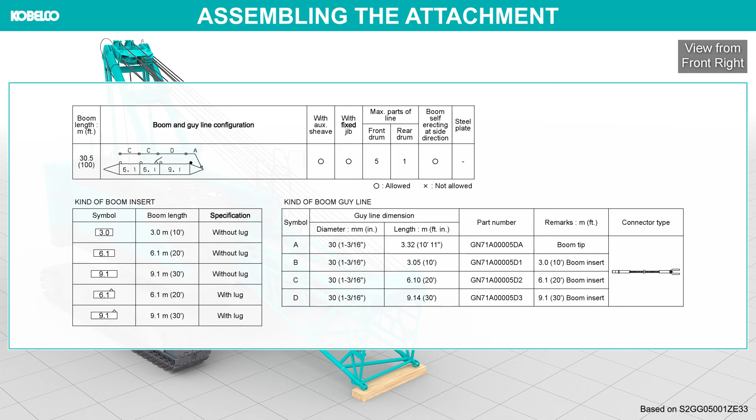This assembly procedure starts when the machine is under the following conditions. When lifting the boom and jib, use the protector or the synthetic fiber sling. Do not lift at lattice pipe. In case of lifting the semi-assembled boom and jib, lift at connecting part.

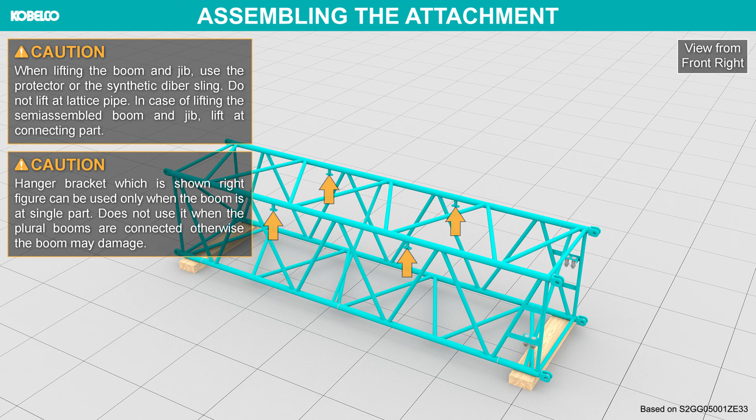Hanger bracket, which is shown in the right figure, can be used only when the boom is a single part. Do not use it when plural booms are connected, otherwise the boom may be damaged. Attach the sling to the boom insert. Lift the boom insert and place it near the boom base.

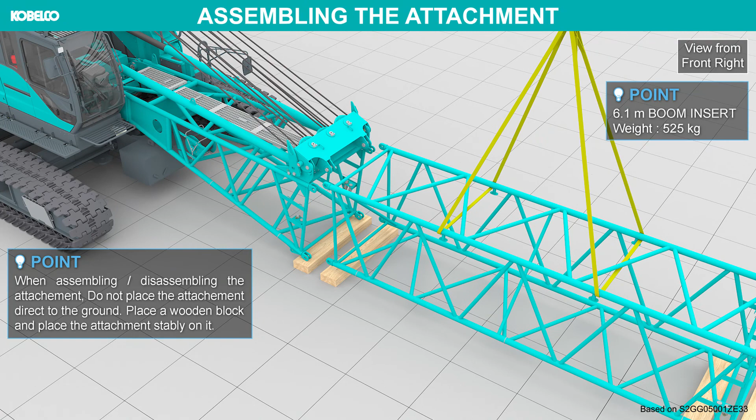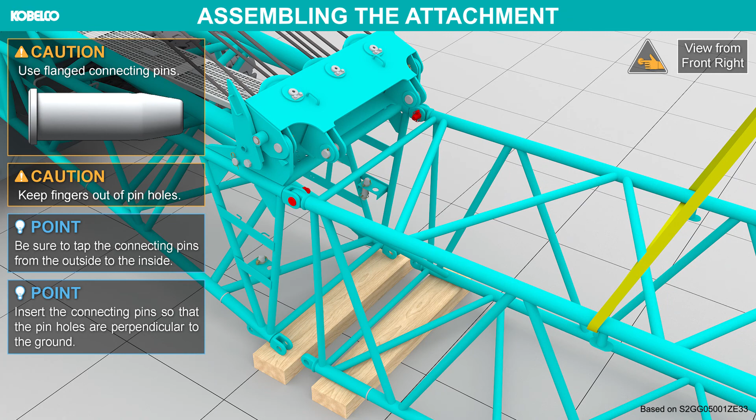Align the top side pinholes. Use flanged connecting pins. Keep fingers out of pinholes. Insert the connecting pins into the top side pinholes. Detach the slings.

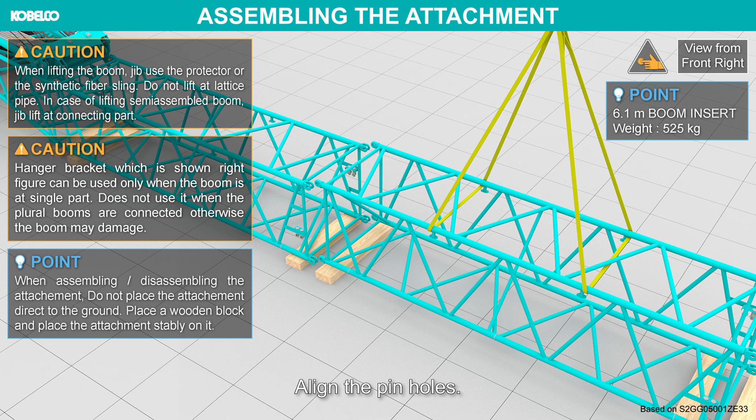Connect the rest of the boom inserts according to the boom configuration chart. Align the pinholes. Insert the connecting pins. Detach the slings.

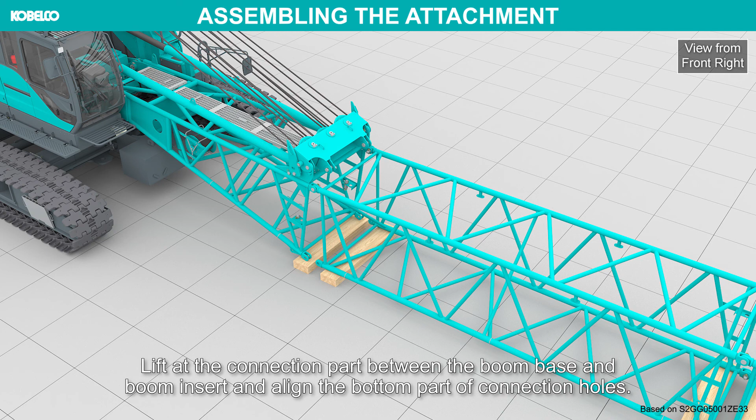Attach the sling to the boom tip. Lift the boom tip and place it near the boom insert. Lift at the connection part between the boom base and boom insert and align the bottom part of connection holes.

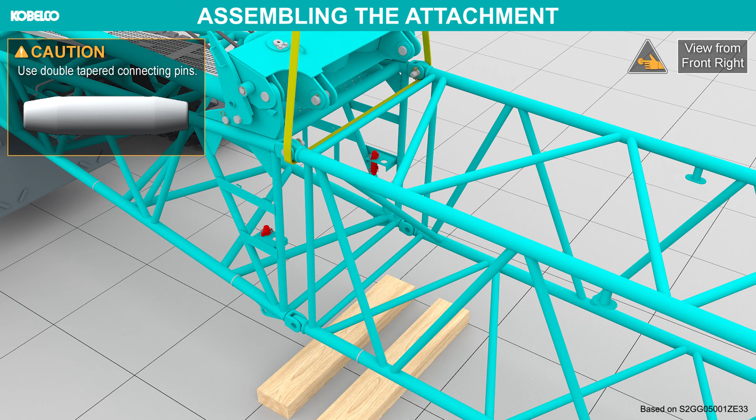Do not stand on or enter under the inside of the attachment being assembled or disassembled. Use double tapered connecting pins. Keep fingers out of pinholes. Insert the connecting pins into the bottom side pinholes.

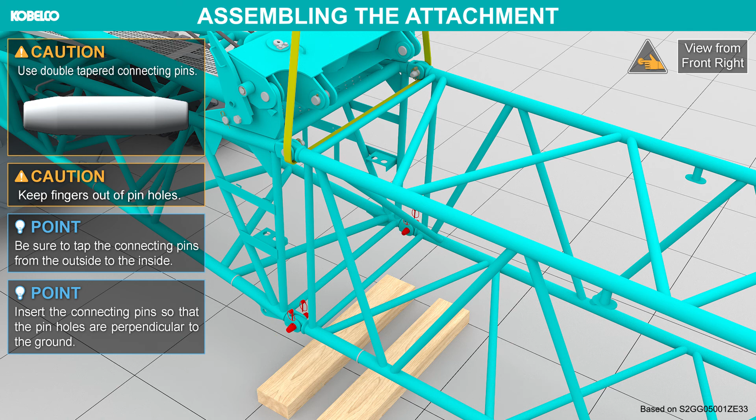Installation of the boom guy line. Ensure to work with the gantry set at work position, and the inching switch should be set in inching position. Do not perform the hoisting work or travel while the boom is supported with a cantilever. Failure to observe this precaution may result in a serious injury or loss of life.

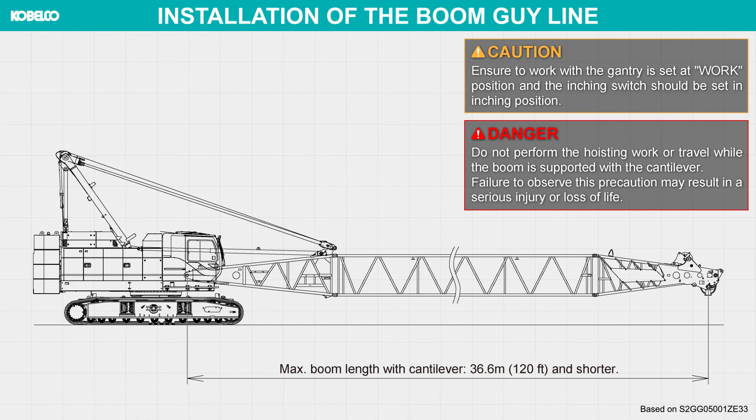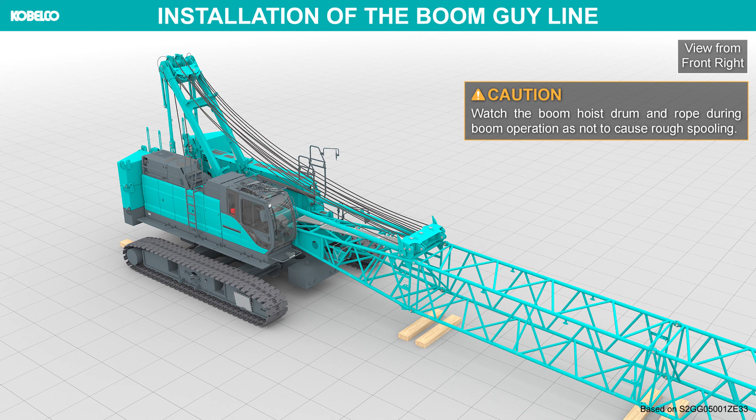Watch the boom hoist drum and rope during boom operation so as not to cause rough spooling. Loosen the tension of boom hoist wire rope. Lift the guy lines and connect them to the top end of the boom tip. Spread the split pins 60 degrees apart, 30 degrees to each side. Do not bend just one side 60 degrees.

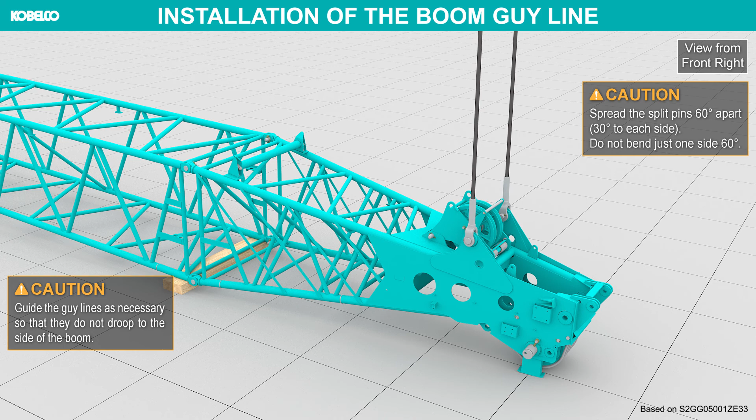Guide the guy lines as necessary, so that they do not droop to the side of the boom. Lower the guy lines onto the boom. Keep the guy lines as straight as possible on the boom. Connect the rest of the guy lines according to the boom configuration chart. Insert the guy line connecting pin from the inside.

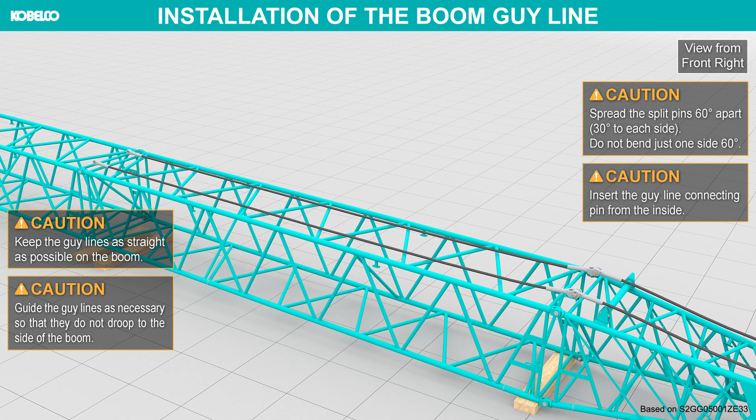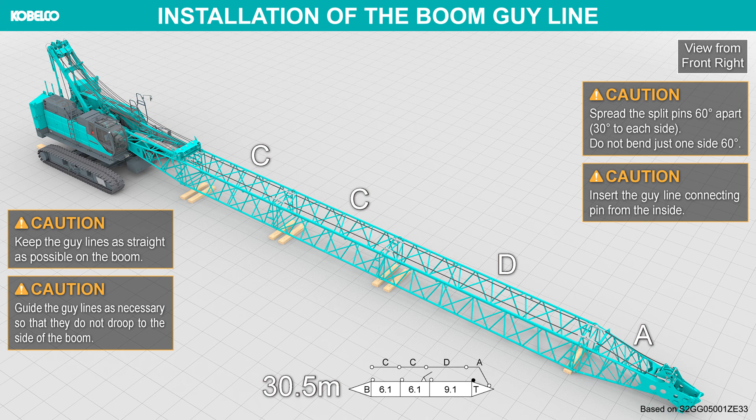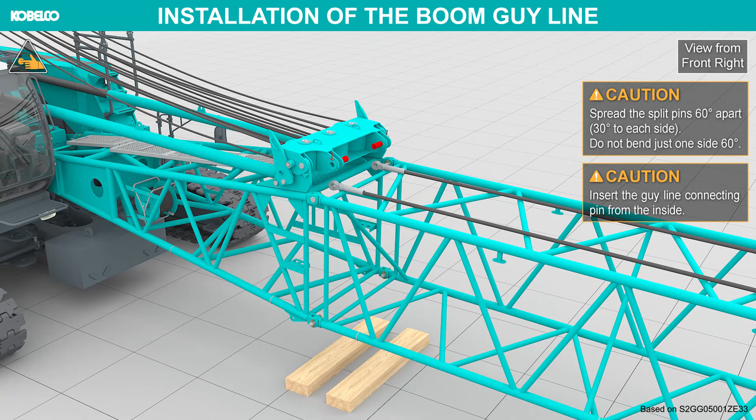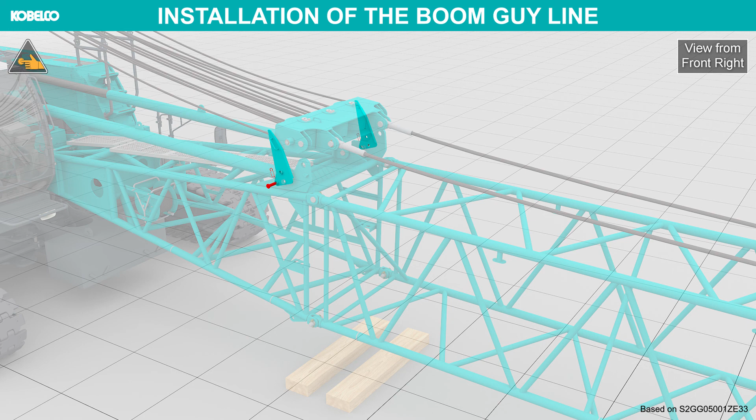Connect the guy lines to the upper spreader. Remove the securing pins from the upper spreader. Hoist the boom hoist drum to lift the upper spreader slightly. Insert the securing pins into the upper spreader. Store the spreader guide. Hoist the boom hoist drum further to draw the guy lines taut.

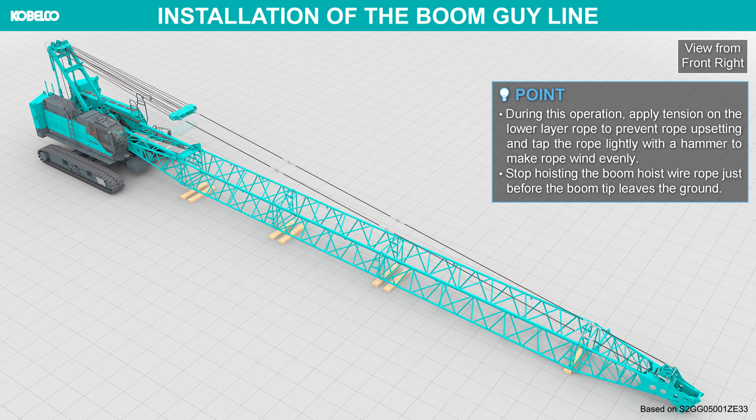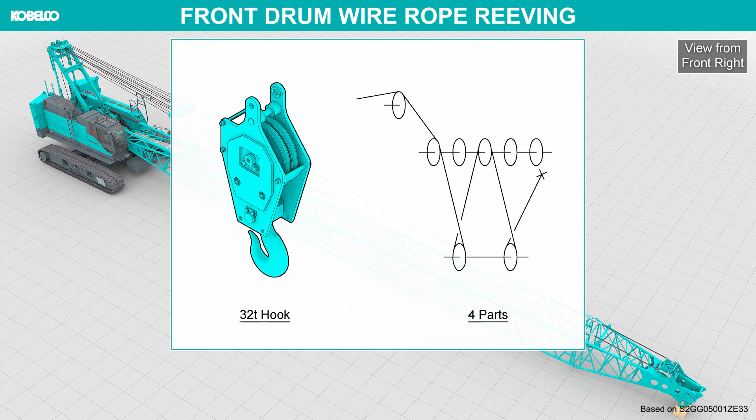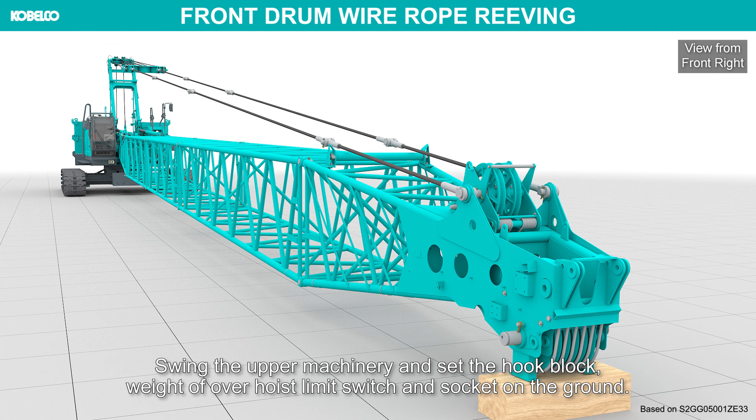Front drum wire rope reeving. In this chapter, a 32-ton hook with 4 parts of line wire rope will be assembled as explanation. Swing the upper machinery and set the hook block, weight of over hoist limit switch and socket on the ground. Set the hook block so that it is in a straight line with the point sheave.

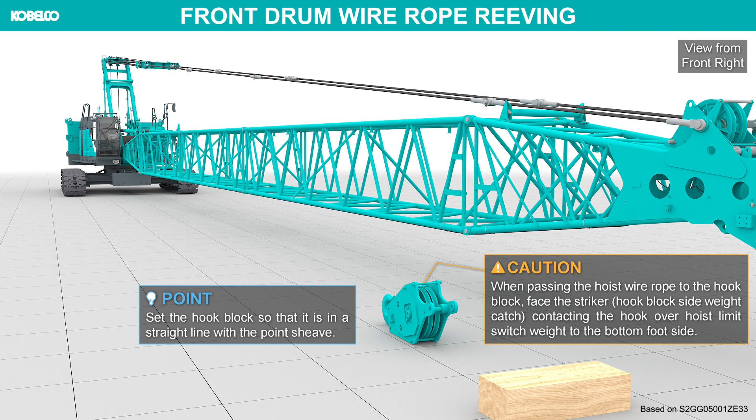When passing the hoist wire rope to the hook block, face the striker, the hook block side weight catch contacting the hook over hoist limit switch weight, to the boom foot side. Swing the upper machinery back over the hook. Pay out the front drum wire rope.

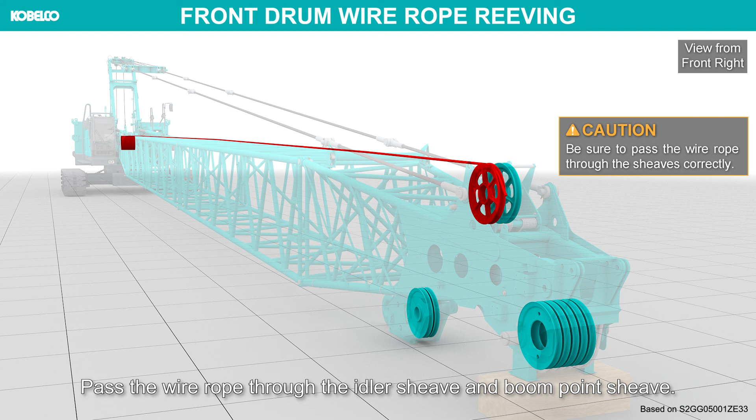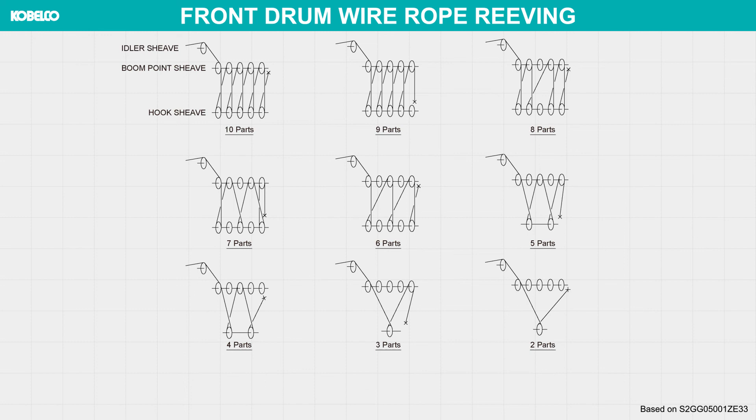Pass the wire rope through the idler sheave and boom point sheave. Be sure to pass the wire rope through the sheaves correctly. Pass the front drum wire rope through the hook sheave and boom point sheave in order. Install the limit switch and pass the wire rope through it. Install the rope socket and secure the end of the wire rope to it.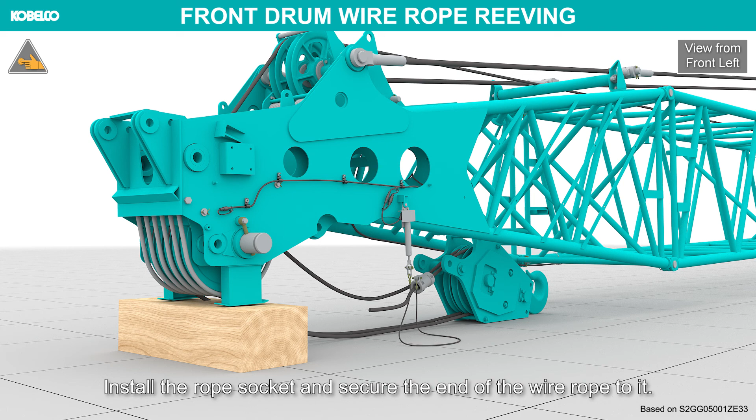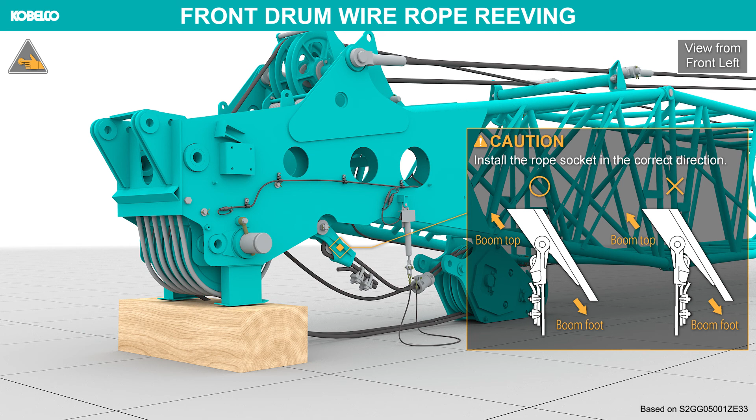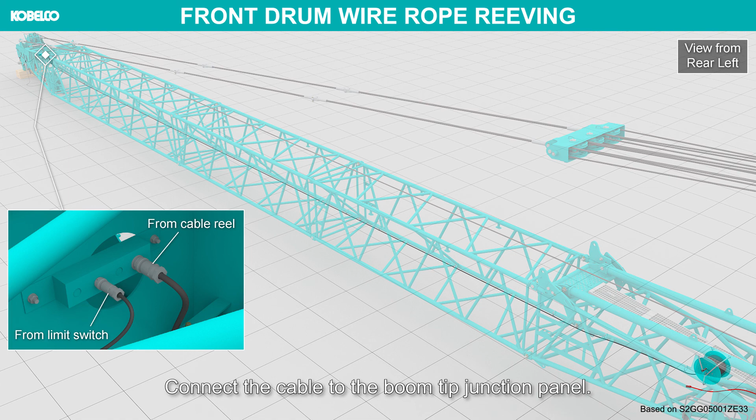Install the rope socket in the correct direction. Pay out the electrical cable from the cable reel. Secure the junction cables of limit switch wiring to the boom with the hanger. Connect the cable to the boom tip junction panel.

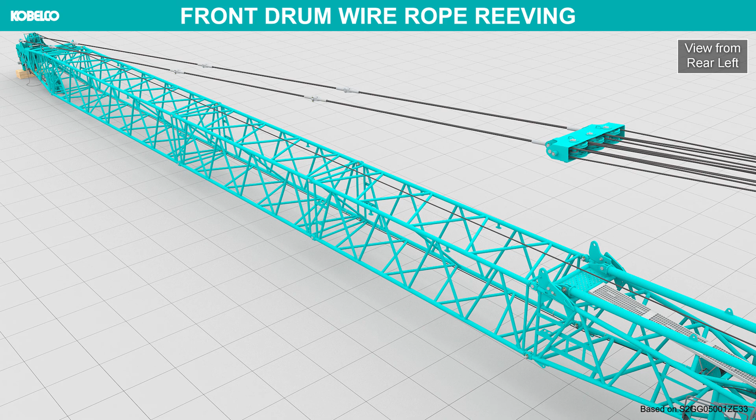Engage the cable reel stopper once having paid out enough cable. Connect the cable from the upper machinery junction panel to the cable reel. Check the connection of the load detector connector.

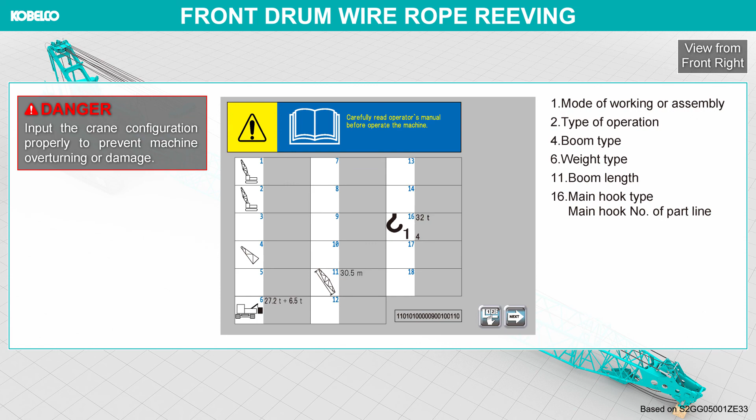Set the crane configuration into the controller. Input the crane configuration properly to prevent machine overturning or damage. Installing the auxiliary sheave. The boom lengths to which the auxiliary sheave can be installed are shown in this table.

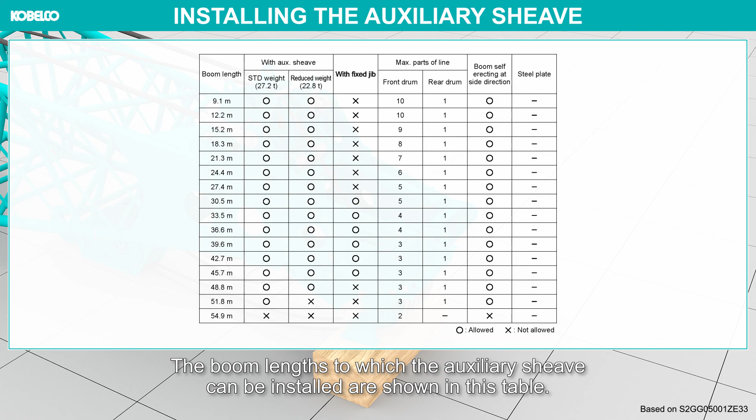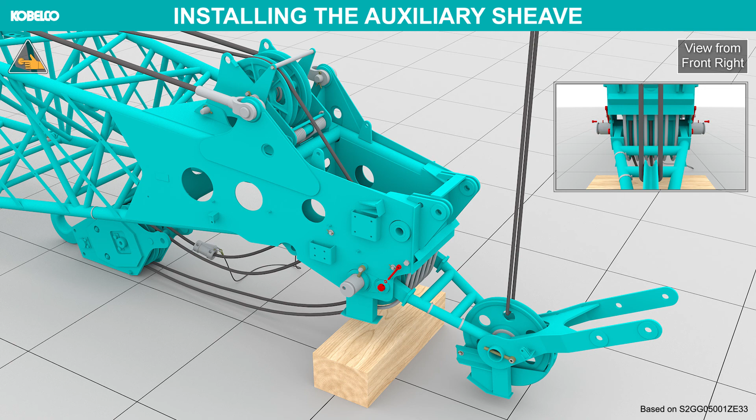Raise the boom and lift the boom point slightly above the ground. Lift the auxiliary sheave and connect the lower frame to the boom tip. Put down the auxiliary sheave to the ground and move back the upper frame to the boom side.

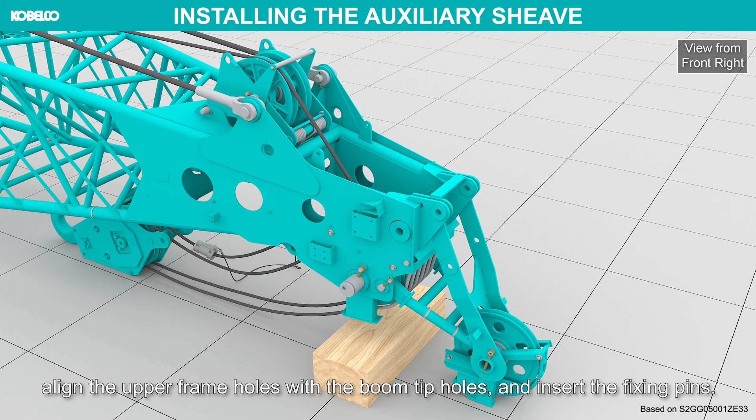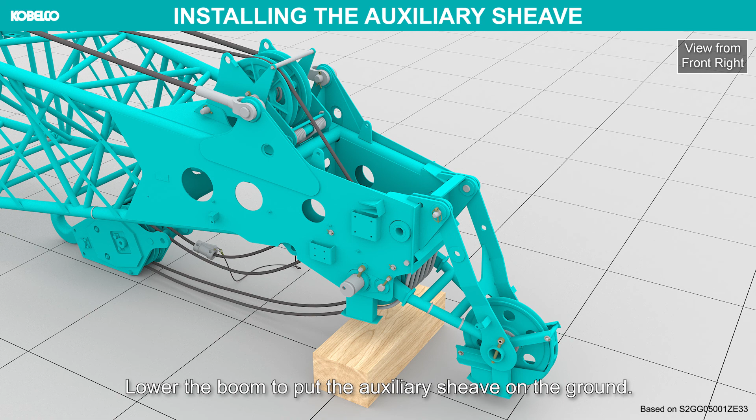Change the lifting point of the auxiliary sheave, align the upper frame holes with the boom tip holes, and insert the fixing pins. Lower the boom to put the auxiliary sheave on the ground. Place the ball hook near the tip of the auxiliary sheave.

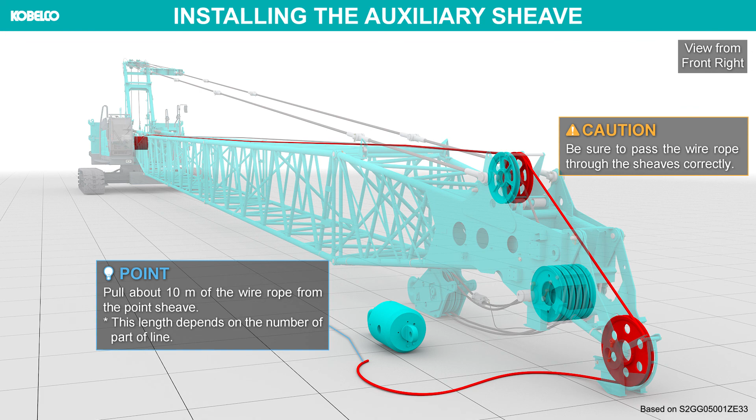Pay out the rear drum wire rope. Pass the wire rope through the idler sheave and auxiliary sheave. Be sure to pass the wire rope through the sheaves correctly. Install the limit switch and pass the wire rope through it. Install the rope socket and secure the end of the wire rope to it.

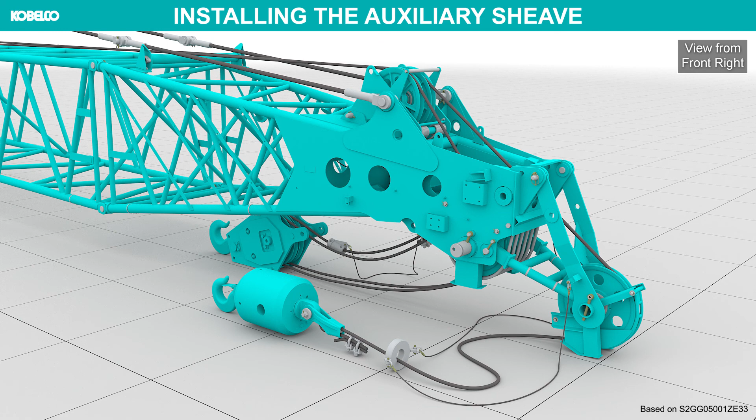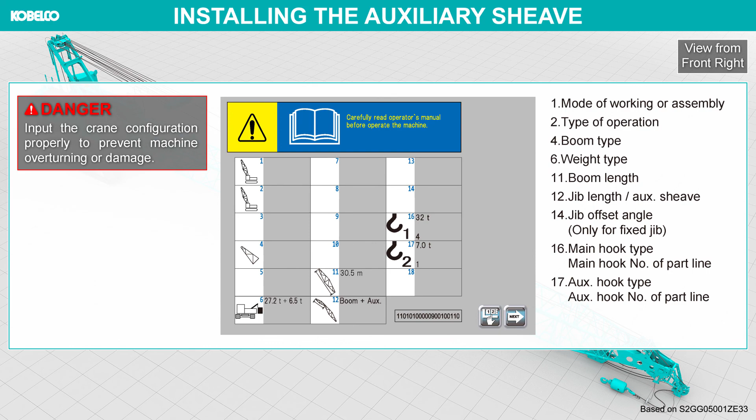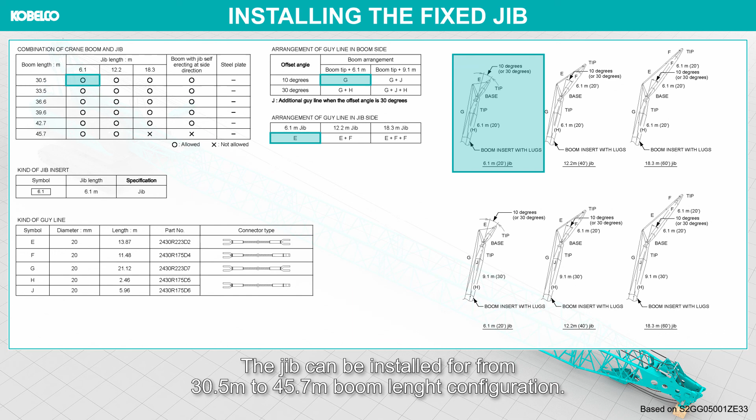Set the crane configuration into the controller. Input the crane configuration properly to prevent machine overturning or damage. Installing the fixed jib. The jib can be installed from 30.5 meters to 45.7 meters boom length configuration. Read the Operation and Maintenance Manual for jib and guy cable sequence for other configurations.

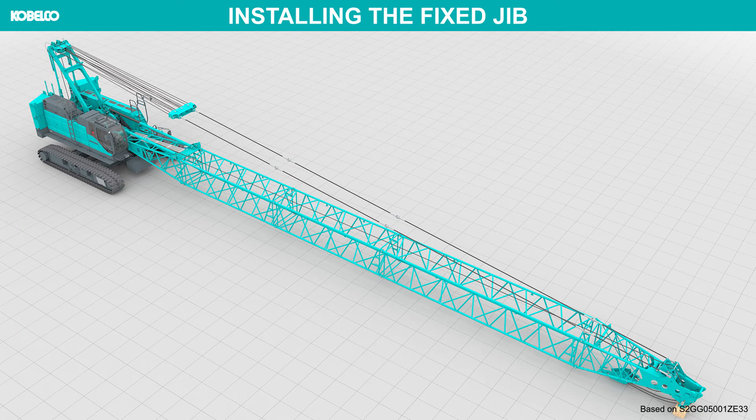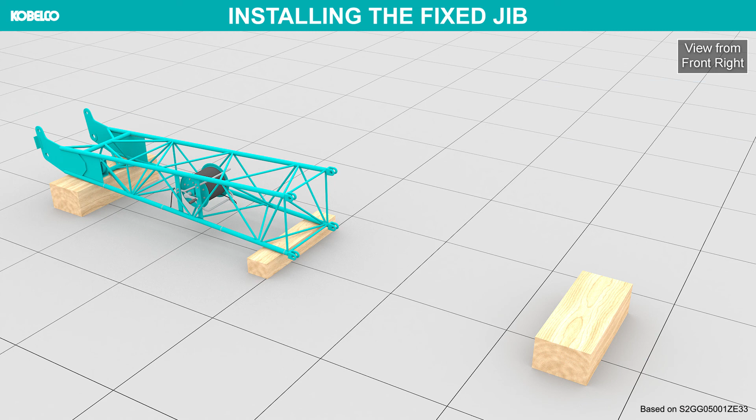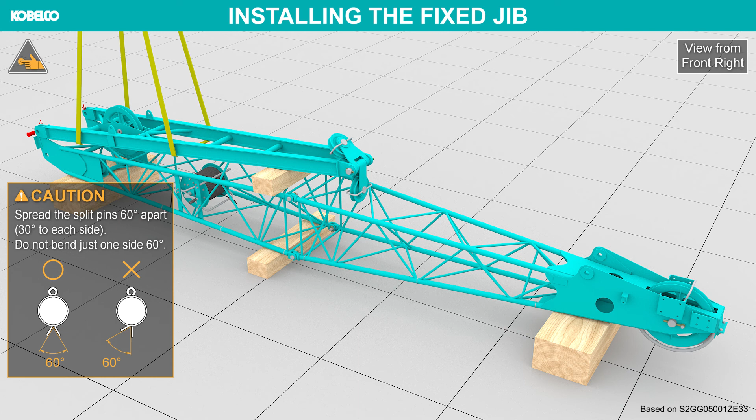The boom insert with lugs is necessary to install the fixed jibs. Place the boom insert with lugs in the correct position according to the boom configuration chart. Assemble jib and strut on the extension line of the boom tip. Spread the split pins 60 degrees apart, 30 degrees to each side. Do not bend just one side 60 degrees.

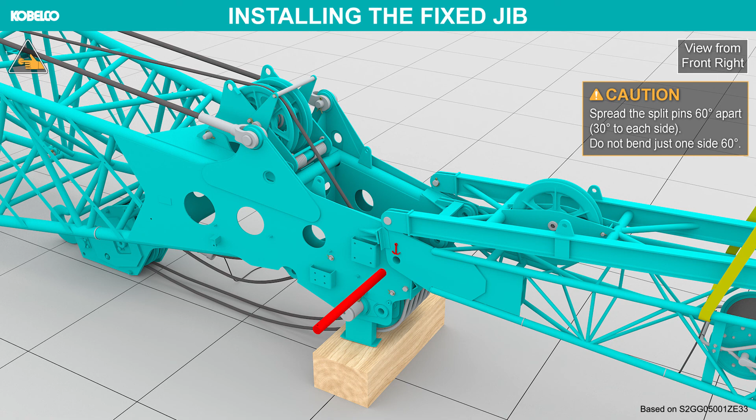Lift up the pre-assembled jib with an assist crane and connect it to the boom tip. Reeve the guy line through the equalizer sheave. Do this work by 2 persons for safety. Connect both ends of the jib guy line to the jib tip. Insert the guy line connecting pin from the inside.

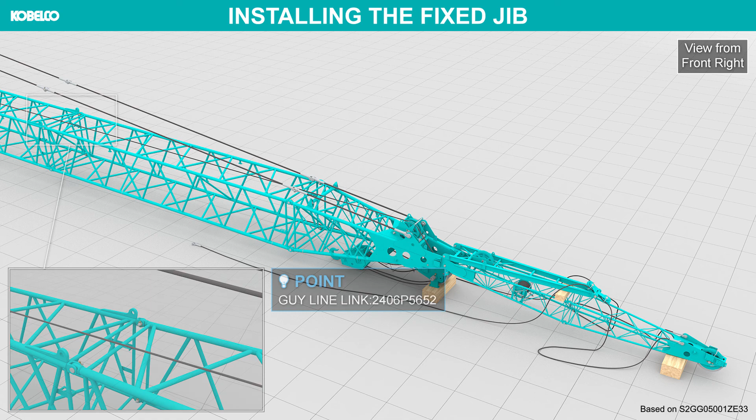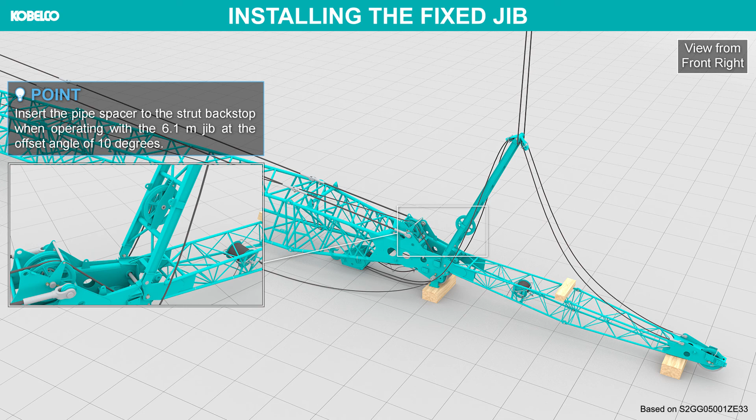Install the jib guy line link to the boom insert with lug. Raise the strut with the assist crane and install the strut backstop. By holding the jib strut, connect both ends of the boom side jib guy line to the lug on the boom insert.

Place the ball hook near the tip of the fixed jib. Pay out the rear drum wire rope. Pass the wire rope through the strut idler sheave and jib point sheave. Be sure to pass the wire rope through the sheaves correctly. Install the limit switch and pass the wire rope through it.

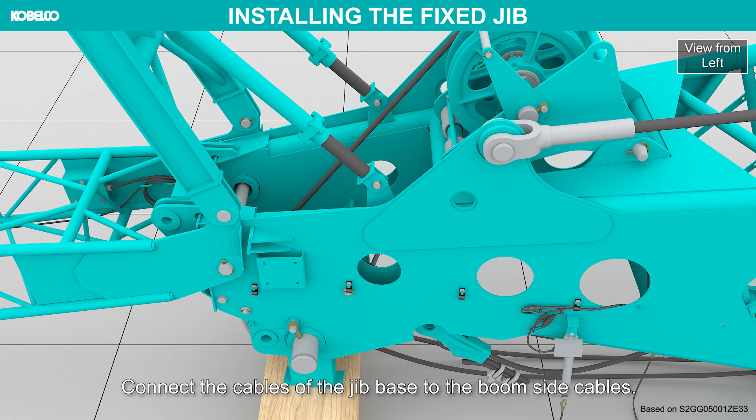Secure the junction cables of limit switch wiring to the jib with the hanger. Install the rope socket and secure the end of the wire rope to it. Connect the cables of the jib base to the boom side cables. Set the crane configuration into the controller. Input the crane configuration properly to prevent machine overturning or damage.

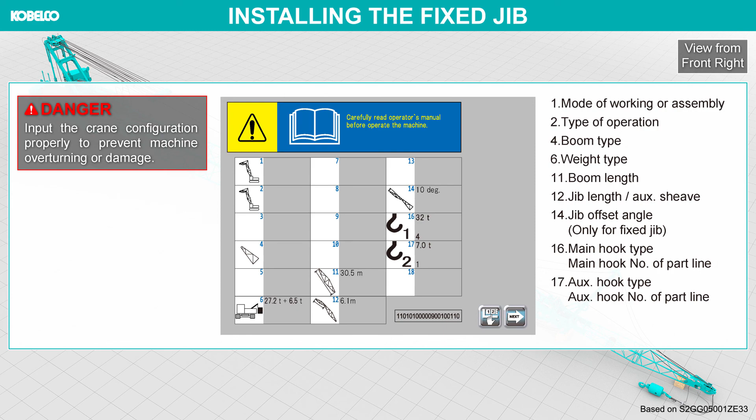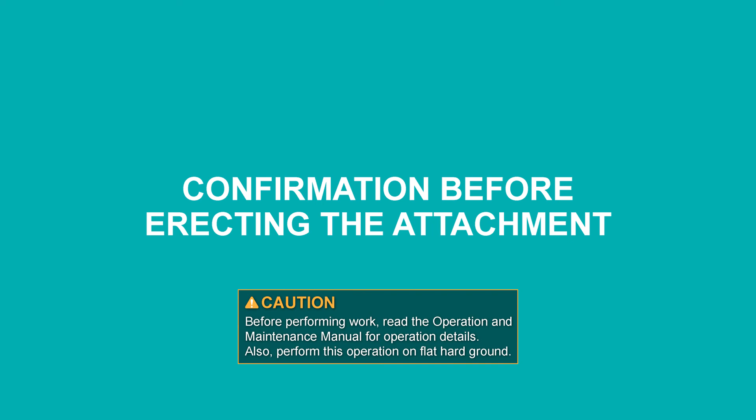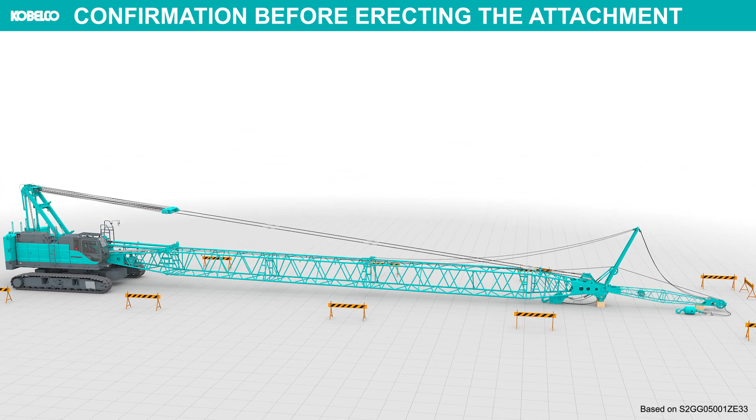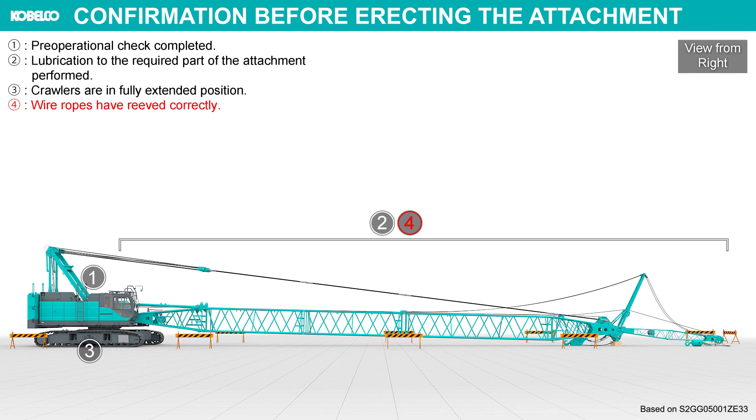Confirmation before erecting the attachment. Check the following items and confirm that there is no abnormality, then erect the boom. Pre-operational check completed. Lubrication to the required parts of the attachment performed. Crawlers are in fully extended position. Wire ropes have been reeved correctly. No tools or articles left on the attachment.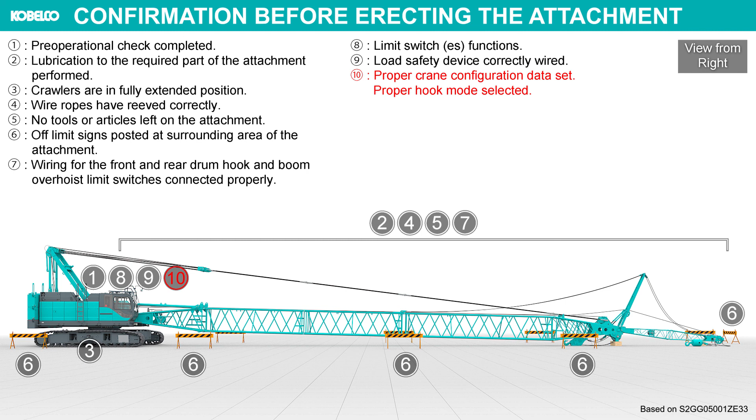Off-limit signs posted at the surrounding area of the attachment. Wiring for the front and rear drum hook and boom overhoist limit switches connected properly. Limit switches function. Load safety device correctly wired. Proper crane configuration data set. Proper hook mode selected. Travel motor set to rear side. Pipe spacer inserted into the strut backstop in case of work with 6.1 meters jib for 10 degrees offset angle.